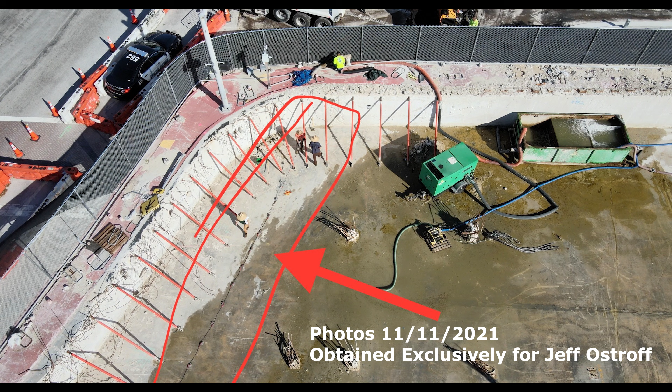In this video, we will update you on the current status of the NIST engineering analysis and forensic investigation into the condo collapse of the Champlain Towers South condominium in the Miami Beach suburb of Surfside, Florida.

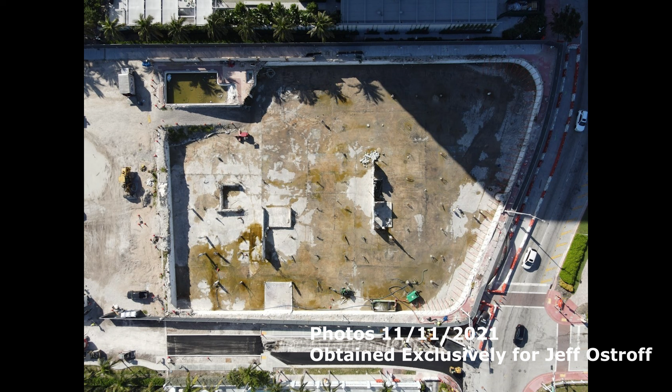Now, a lot of people have been asking me over the few months here, who's in charge of the investigation? Is it NIST? Who is NIST? Why are they involved? Why is there so much secrecy? When are we going to hear updates from them? We don't trust them. They are not giving us information. They tell me, hey, we want answers now. We want them to blame somebody now so that heads will roll now.

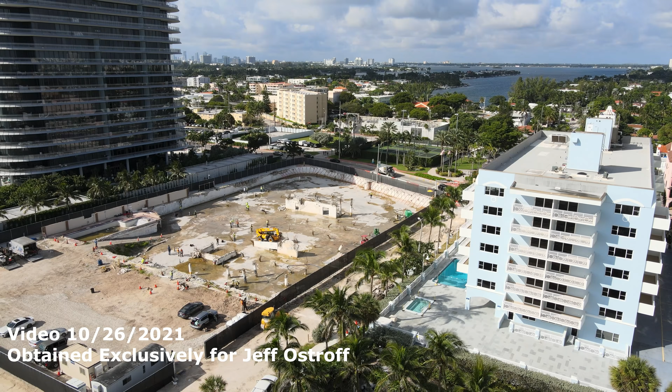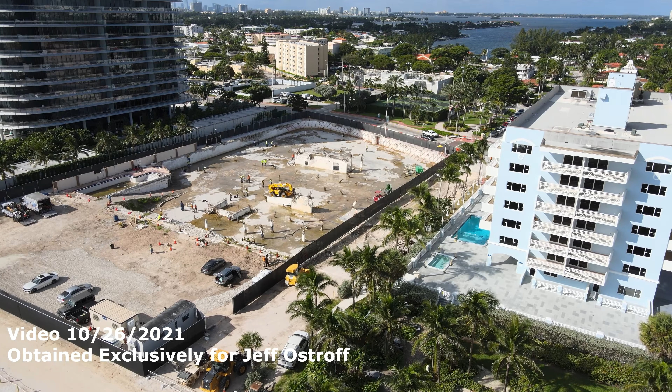Well, I will explain to you in this video the current updates as of a couple of days ago and how everything is all congealing together so that you'll be more confident about the engineering process behind this analysis, and hopefully you will not be as anxious and feeling left out and in the dark as to what is really going on.

So NIST gave a presentation a couple of days ago at the National Construction Safety Team Advisory Committee meeting, and so we're going to show you some of what they presented as part of this update. The update also introduced a whole new project that has been added to the investigation, and based on what they were discussing in the update, I think they're going to be creating a few more projects as well.

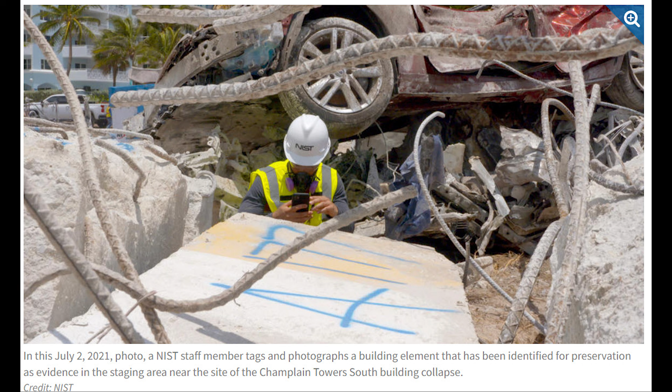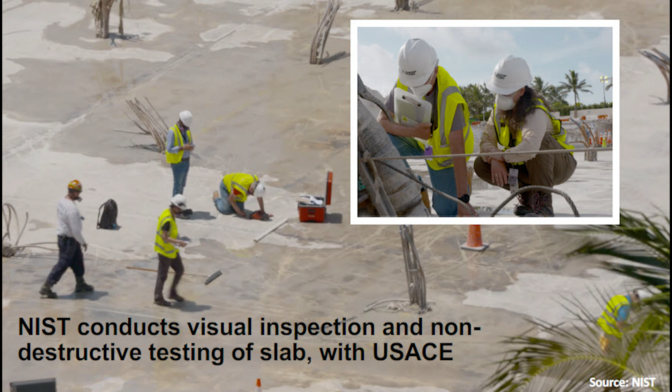But since we get so many questions on this as to why NIST is involved in the first place and how this is all tied in together to the investigation of the condo collapse, why is the federal government involved in the first place? So let's take a quick look here at who NIST is and what is it that brought them into this Miami condo collapse situation in the first place? I mean, why are they here?

So to get all of us on the same page with a simple and complete understanding about NIST, let me tell you about them. So NIST stands for the National Institute of Standards and Technology. They're a division of the U.S. Department of Commerce, and they were created back in 1901, so they're basically 120 years old.

It's one of the United States' oldest physical science laboratories, and it was created really to improve the U.S.'s second-rate measurement infrastructure. We were lagging behind Europe, China, and other developing countries. We were like the laughing stock. So NIST was created to create much better standards and testing and engineering and all that other stuff.

So NIST literally sets the standard for scientific and engineering research, from the smart power electric grids that we have now and electronic health records to the atomic clock and all of that other stuff. They do all sorts of research into advanced materials, computer chips. And guess what, folks? Many of the products and material standards and measurement standards which you and I use today rely on NIST technology measurements and standards. So you've been using and benefiting from their research without even knowing it.

Why is NIST involved here? So we know who they are and we know what they do, but why are they involved in this fatal collapse of the Champlain Towers South condominium? They're just a bunch of eggheads, right? That set some standards. Why are they here?

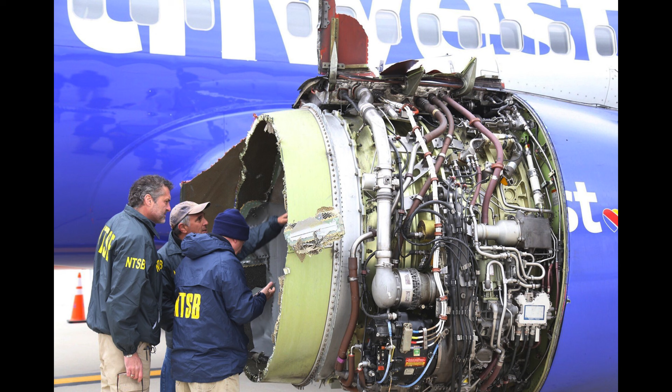The NCST Act was signed into law back in 2002 by President Bush, W. This act calls on NIST to establish teams to investigate building failures. These authorities are very much modeled after those of the National Transportation Safety Board, the NTSB. Those are the guys that investigate the transportation accidents, the bridge collapses and airplane crashes. Whenever you hear of an airplane crash, about 2 years later, you get the final report from NTSB. So NIST will be doing a very similar type thing.

And so the National Construction Safety Team Act gives NIST the responsibility to dispatch teams of experts within 48 hours after major building disasters.

So under this law, the NIST director consults with the U.S. Fire Administration and other federal agencies, and they're required to make a standing committee of up to 12 people to advise them on carrying out this NCST Act and to review the procedures and stuff like that and issue reports to Congress.

The Station nightclub fire was a very tragic fire in Rhode Island, and 100 people were killed in a fire there from the Great White concert, from the pyrotechnics. Of course, everybody knows the Joplin, Missouri tornado in 2011, the deadliest, costliest tornado in U.S. history. They have two ongoing investigations, too, with NIST. And number one, of course, is our current one, the Champlain Towers South condominium in Surfside, Florida, announced on June 30th, 2021. And also, NIST is investigating Hurricane Maria and its effects on Puerto Rico.

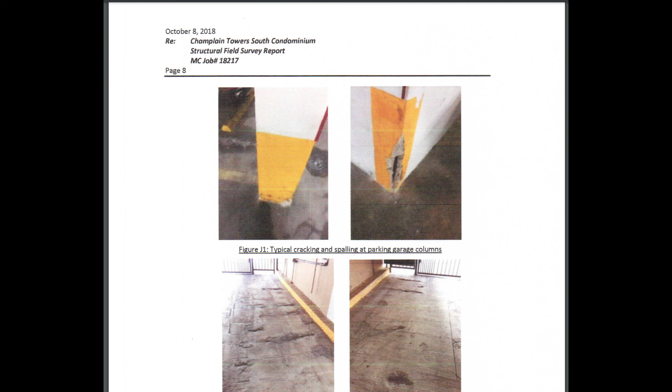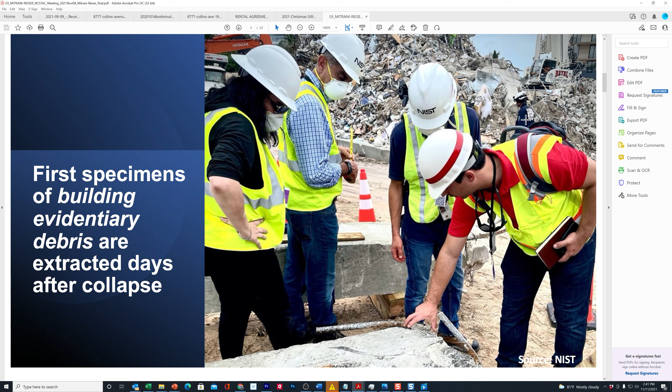So the first presentation was given by Judith Mitrani-Reiser. You can see her there. She is the NIST lead investigator on this investigation into the Champlain Towers South condo collapse in Surfside, Florida. So first, what NIST presented was sort of a mini timeline. They showed that this was the press conference that kicked everything off on June 30th, announcing the NCST investigation. And they showed a few pictures from the response effort after the building collapse. They talked about first specimens of the building debris, how they're extracted days after the collapse.

They mentioned that NIST is coordinating evidence identification and handling procedures with the Incident Command, which is usually the Miami-Dade Homicide and the Miami-Dade Fire Departments. They mentioned that NIST engineers help identify evidence from a safe distance. So they weren't in the way. They weren't up on the pile with the rescuers like you see up here. They're standing off to the side looking for key evidence. So they worked with experts from NSF, that's the National Science Foundation, FSU, Florida State University, all these different fire departments and stuff like that, and they supported the remote sensing activities.

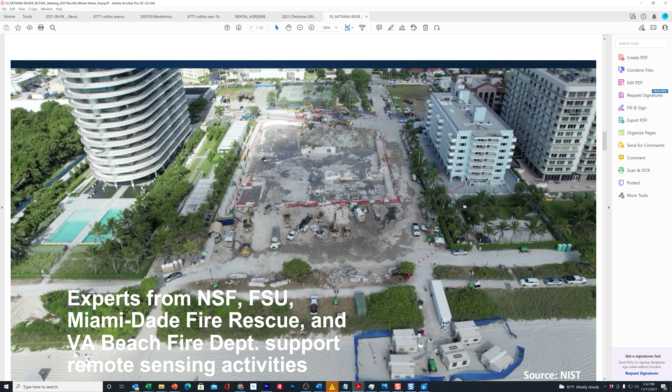So what they had done, I don't know if you can see it over here, I remembered seeing pictures of it from our local news, but I think it was right here on the building on the left, the 87 Park, that's that new condo. Right here on the 3rd floor, it looks like they had set up a bunch of tripods of equipment where they were aiming everything down here and doing the LiDAR and the laser mapping and every other type of sensing they could do to fully digitize the entire property.

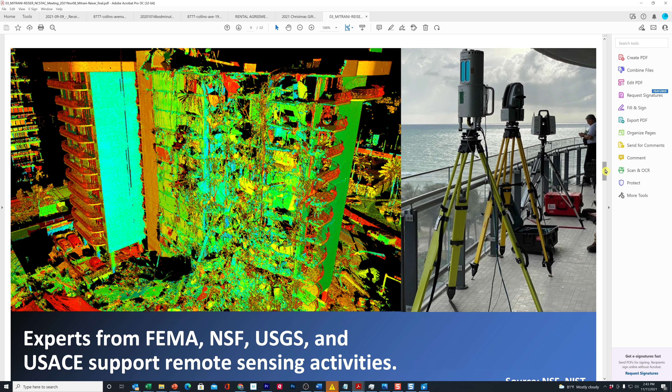So here they're showing some of the results. This screen here was something that we had not seen before. NIST presented this at the meeting and said this was one of the first outputs of some of the imagery that they've shot there. And this is some of the equipment that I mentioned that was on that patio of that condominium that was used to take all of these images and other measurements and readings.

Okay, now they did say at the meeting that NIST established some evidence tagging protocols with the first responders, and a lot of stuff like this had not even been done before. The complexity of the systems that they used to log the evidence, the software, the databases, just everything. They talked about all that.

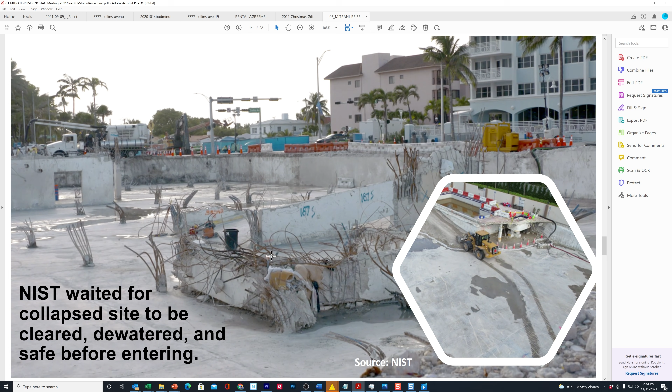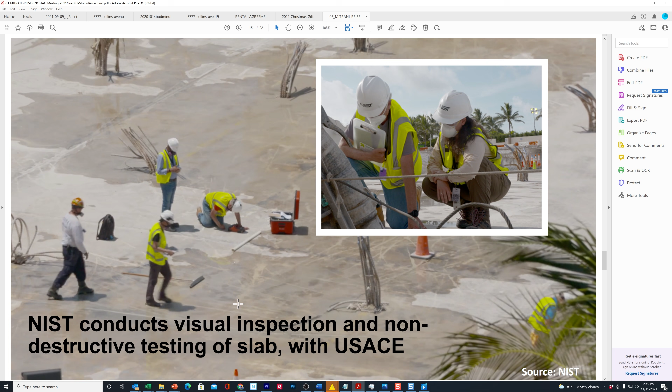And so here they were saying that NIST waited for the collapse site to be cleared and dewatered and safe before they entered down in here to start taking non-intrusive measurements and things like that. So on this slide here, they were showing us how NIST was conducting visual inspection and non-destructive testing of the slab. So USACE is actually the U.S. Army Corps of Engineers, in case you weren't familiar with that.

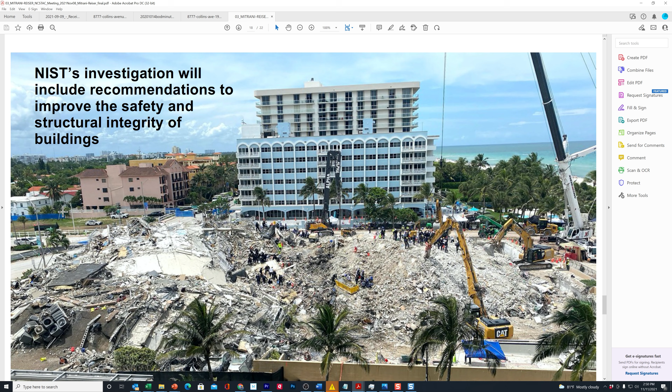So these are the guys that start taking pieces of the material of the concrete and they'll do chemical tests on it, probably advanced life testing on it, all sorts of tests to see, hey, what's the current pH of it? Did the pH drop too much that the concrete got weakened? Was there the appropriate amount of aggregate in the concrete? This, I think, will be probably the most beneficial.

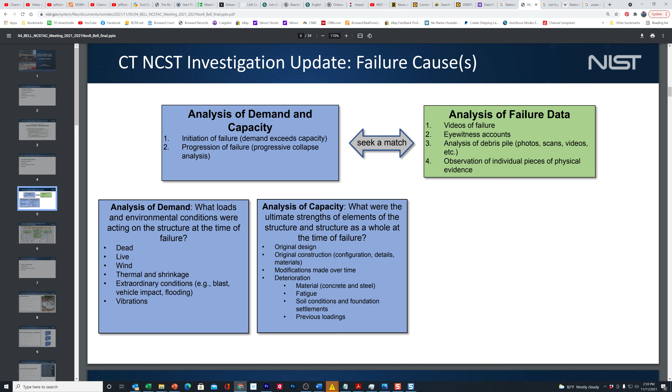On the capacity side, they have to look at the original design. They have to look at the construction as constructed, which is often different from the plans that you get, and the configuration of the materials and everything. They have to look at modifications made over time. And lastly, they've got to look at deterioration, which we saw a lot of even in previous engineering reports from 2018 from Morabito, right? You have to look at material and fatigue and all of this stuff.

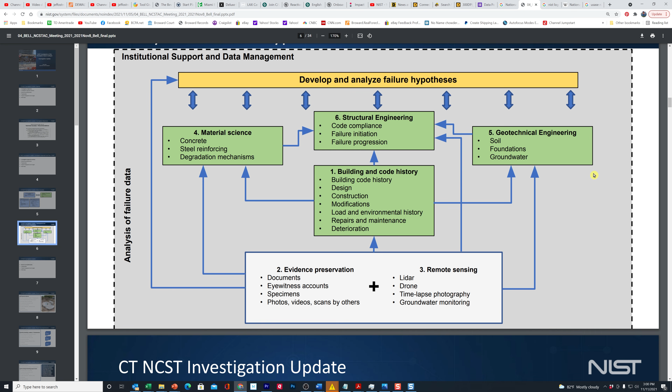Okay, so he's showing here the different projects. Remember I showed you there were 6 projects? He's showing you the main 4 here and how they all work together, and then the evidence preservation and the remote sensing. So this right here, folks, is our first bird's eye view of what NIST intends to do to analyze this building failure in Miami and tell us how this condominium collapsed. A lot of people were untrusting and saying, well, I don't know what these guys are doing. This is what they're doing right here, right now. So they've got it all down to a science.

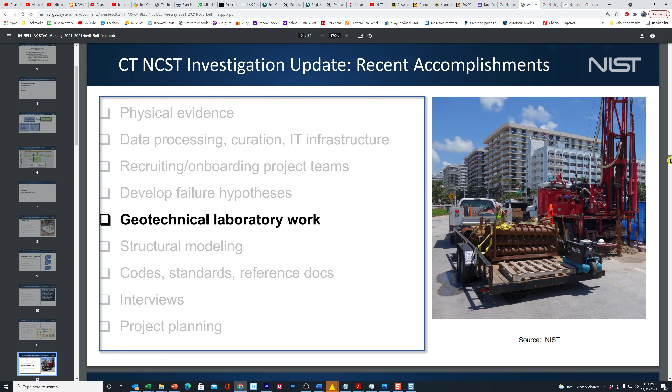The geotechnical laboratory work. This is where they're starting to find out what's going on down below the building. We want to know what's going on here. Is this thing on a floating lake or what is it? What's happening? And they've already started doing their structural modeling. Now, this is all they showed.

They showed this one slide, but you can tell how far along they've come here, folks. They've got all the columns already done. They've got everything built up, and I'm willing to bet they have a lot more data than they're showing in this slide, because if you look closely here you can see the shear wall, the big one, the good one that survived, and then here you can see the tiny shear wall on the part of the building that

collapsed over here. So this red shear wall right here, which to me was basically a joke, it's just too small, and this is the stairwell on the other side of the building. This shear wall right here was actually malformed because, to my knowledge, it was built out of concrete block and not enough rebar and poured concrete to really thicken it up.

But here's some trivia for you. A lady on the 6th floor, she was down here, but I'm going to show you right up here. Her unit was right here at like 611, and when she felt the building shaking, she goes to run out. She was only living in the building for a month. She didn't know there was this emergency exit right here with the staircase. She had no idea it was there.

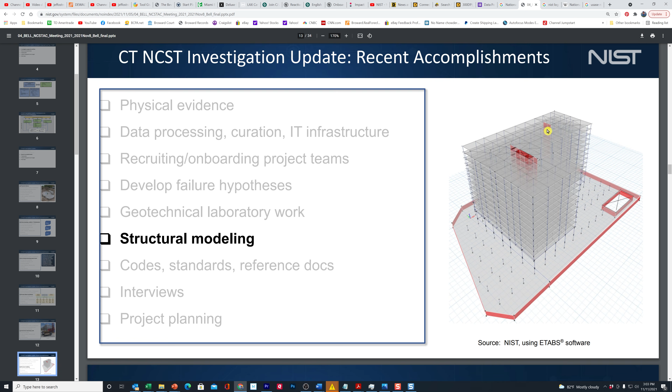They're going to be conducting interviews with probably anybody and everybody. And remember, NIST has subpoena powers as well if somebody decides they don't want to talk to them. They're going to look at the building code history of the entire area, the buildings, and to see if it was built according to the standards, and check how the standards evolved since then, and inspections and maintenance and all that, and see if any changes need to be made, or if any of that led to the collapse.

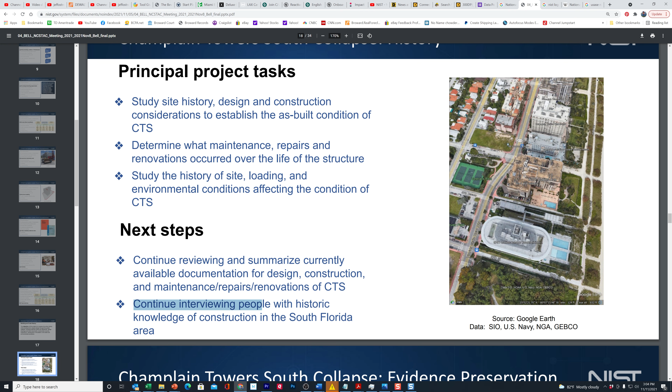So right here under next steps, it says continue reviewing all the available documentation. And look here, it says continue interviewing people with historic knowledge of construction in South Florida. So that says to me, interviews have already begun if they're being truthful about this. They're talking about evidence preservation. They want to make sure all of the tagging and everything is done properly, and that everything's organized properly and that the evidence is stored properly.

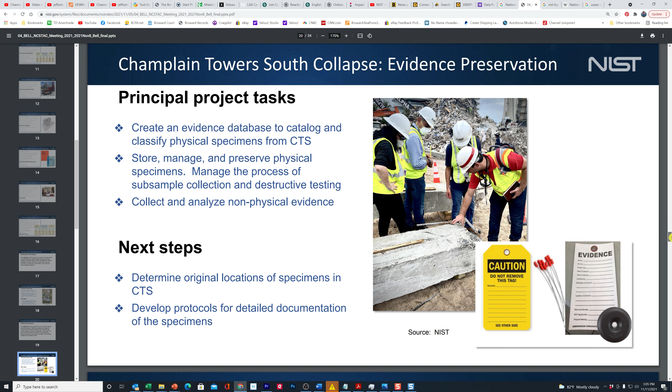Now, with a lot of the evidence they have, now they want to determine where was it in the building. Because when you have a pile, now you got to start piecing it together like a massive 3D puzzle. This isn't no simple 500-piece puzzle, folks. This is a massive 3D mystery that they will then have to try to figure out which columns were where and what floor slabs were where. They're going to do more of this geospatial and 3D imaging and stuff like that.

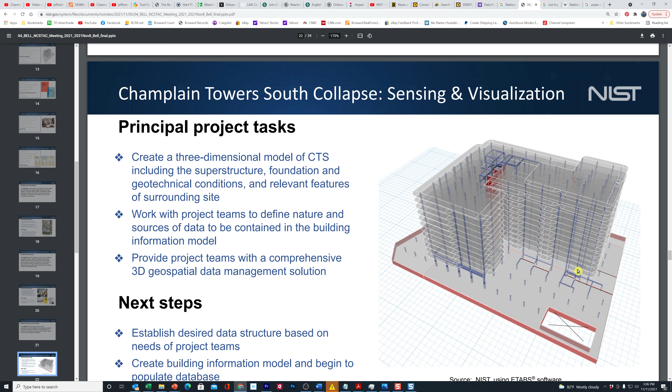People that were challenging me on my video from the other day saying, oh, you're wrong. The beam is supposed to be one cell north, and you were wrong, and it fell at such an angle that it moved it one whole cell. I'm like, that's just ridiculous. But here it shows that I was correct in showing you exactly where that H-beam was.

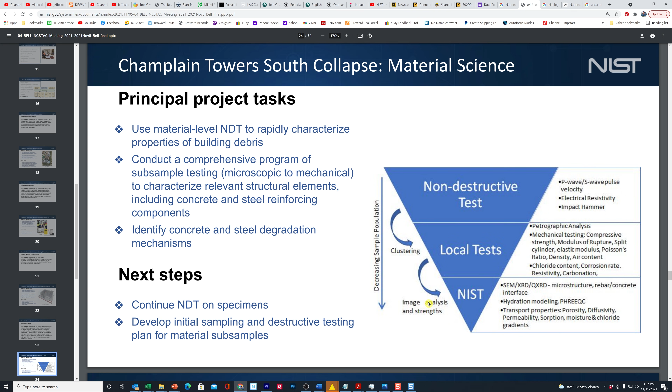So they're talking about the different layers of the tests that they're going to be doing. So they start off with the non-destructive tests first. They do all of these. They're showing you what they're doing. Then they're doing more local tests, and then they may start to, after this, go into more destructive type later on as they need to. And then, of course, with the geotechnical test, they want to evaluate the condition of the foundation here, and that's what they're talking about here.

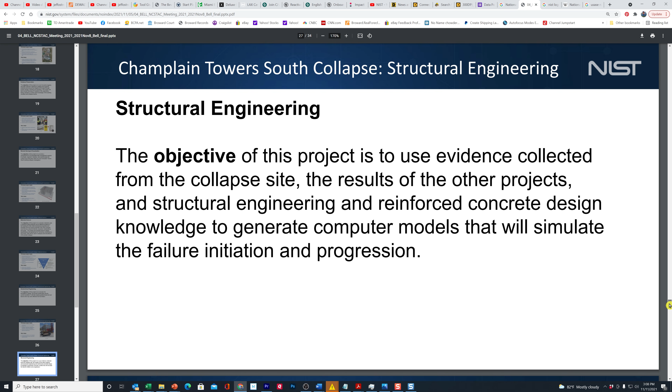So then in the structural engineering project, they want to use all of the evidence collected from the collapse site. And of course, they can use the results from other projects that they've worked on as well, and their knowledge of structural engineering and reinforced concrete design. And they'll use models that simulate the failure, and hopefully they'll give us a good 3D model that is based on everything they have found, which will be more accurate than all of the models we've seen so far on the internet. Pretty nice models that other people have done, like Mike Bell, but they may need to be refined with the newer information that NIST has.

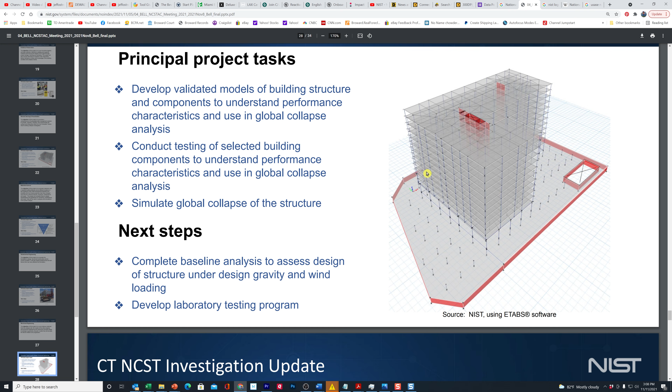And then here again, they're showing more of the 3D, and what they want to do is just use these models to determine where the strengths and weaknesses of this building were. And then of course they're talking about project management and budget, and how often everybody meets. So all these individual project teams here, remember 1 through 6 that I showed you, they will meet weekly. The collective project teams, they all meet weekly. The lead investigator and the associate investigator who presented all of these slides here today, they will meet weekly as well. The investigation leaders meet with the director level people every 2 weeks to give them updates.

So then they talked about protocols that they need to manage the evidence, and also how to share it and how to keep certain people from getting at certain evidence that they don't need to get at, and process all the data that's collected. So it's just a huge amount of data that they need to collect and figure out how to save it in the best possible way. Well, so that's what they presented at the meeting the other day. As you can see, we didn't get any answers. They didn't give us any, well, here's what we think so far.

You'll find that standards bodies and others like NTSB and NIST will not tell you what they think is the cause until they know 100% the cause, and they've tested it and modeled it and duplicated it and can turn it on and off like a light switch. I've been telling people this for years as an engineer at Motorola: when you have a failure mode, until you can control it and turn it on and off like a light switch, that's how you know you've got the right root cause of the failure. And so that's why they're going to be tight-lipped about this. They might give us little snippets, here's some models that we've worked on, blah, blah, blah. But typically, you're not going to see a whole lot until they have the final report.